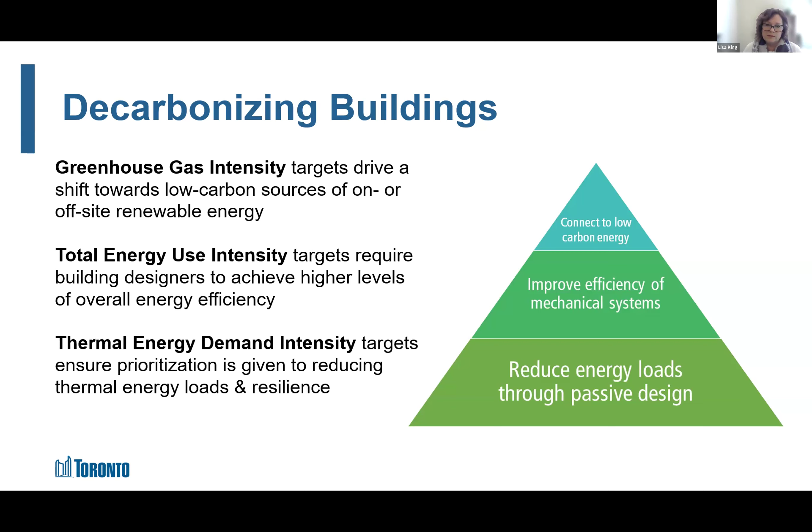In 2022, when we advanced TGS version 4, it focused a lot on climate change mitigation and adaptation in general, and we introduced embodied material emissions targets, but without numbers. Actually, not targets, but the process. So we introduced the requirement to do a life cycle analysis at that time, but we didn't include any numbers or targets. The reason we tried to introduce that was because we recognize how important embodied emissions are - to get toward that kind of aggressive action we're talking about, we have to start to deal with material emissions and not just operational emissions, as typical codes and standards do.

The upfront emissions from the manufacturing stage right to the construction of the building, starting at the construction site, and the transportation in between, account for a significant amount of life cycle emissions. So we're starting to look at the life cycle emissions of buildings as opposed to just what happens when they're operating.

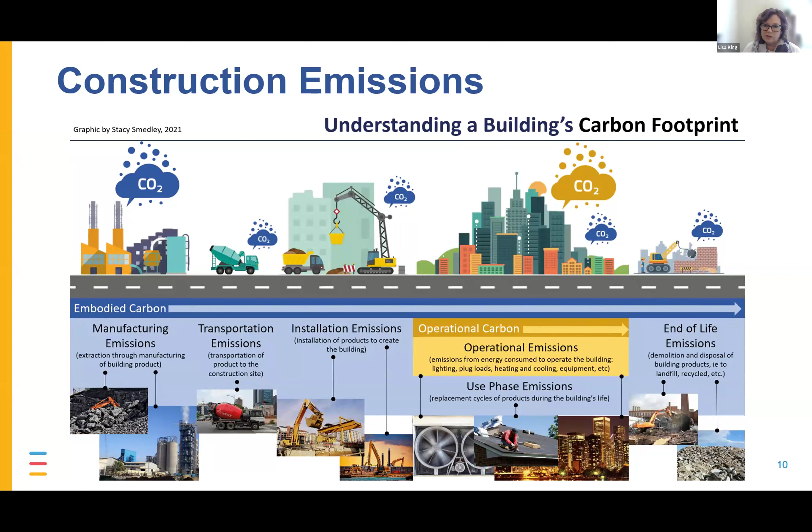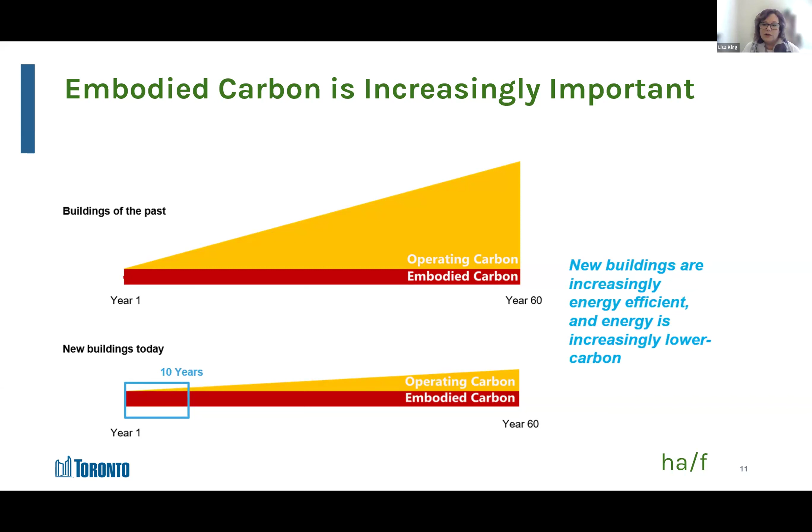And as we get more aggressive on those operational emissions targets, embodied carbon takes a more significant portion of the total emissions of the building. That's another important factor we've been considering, and the reason why we need to move on and advance into addressing embodied carbon from materials.

And of course, the global emissions aspect too, where I think this might even be low - at least 11% of emissions are coming from building materials and the construction stage.

So in terms of reducing embodied carbon, the approach we took was to go into study, which is usually what we do when we're looking at advancing something new within the Toronto Green Standard. We had a study undertaken that was funded by the Atmospheric Fund. It started in, I think, 2021, and it was for all Ontario municipalities, not just the City of Toronto, but we were kind of the guinea pig, I guess you could say.

That study was led by Mantle Developments with support from the HAF Studio, associated with the University of Toronto. That one, the regulating embodied emissions of buildings, Part 3 buildings policy primer, was mainly for Part 3 buildings. At the same time, there was another study going on led by Chris Magwood and Builders for Climate Action that focused on the low-rise Part 9 wood frame construction.

Together, those two studies basically educated all of us as municipalities on what embodied carbon is, why it's important, what the main emission sources are, how an LCA is done, but even more importantly, could we set some benchmarks or targets and apply them within our standards? We did have quite a bit of consultation and workshopping through that study too - that was a real part of the education aspect of it.

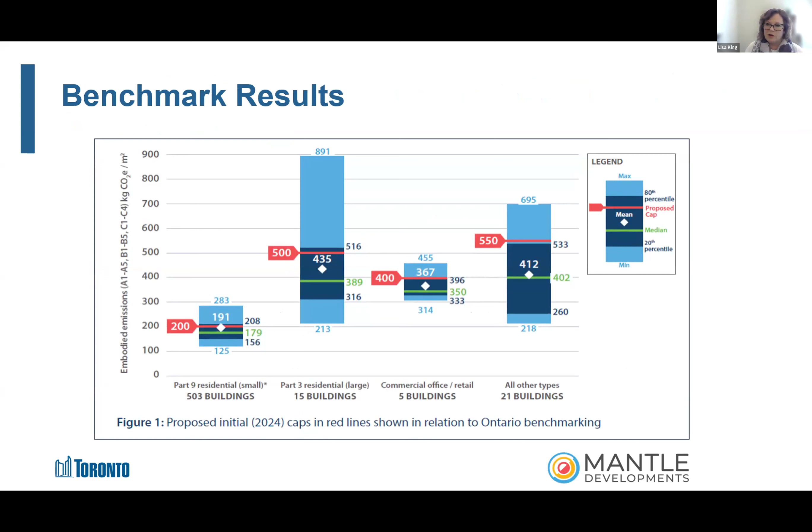Thanks, Lisa. So to get into what the caps actually are and what we're set at - we went to council with those reports, and council adopted the first embodied carbon caps in North America.

So we have mandatory caps for city-owned buildings and a voluntary tier 2 cap for private mid to high-rise and non-residential developments. Those two caps are the same: 350 kilograms of CO2 per meter squared for residential and commercial developments, and 400 kilograms of CO2 per meter squared for other building types. That is for life cycle stages A1 to A5, so just upfront.

Then we have another voluntary tier 2 cap for low-rise residential Part 9 townhouses, which is 250 kilograms of CO2 per meter squared, just for life cycle stages A1 to A3. And lastly, we have another voluntary cap for tier 3 as part of the Toronto Green Standard, as well as a high performance cap for city-owned buildings. Those caps are 250 kilograms of CO2 per meter squared for residential and commercial, and 275 for other building types, again for life cycle stages A1 to A5.

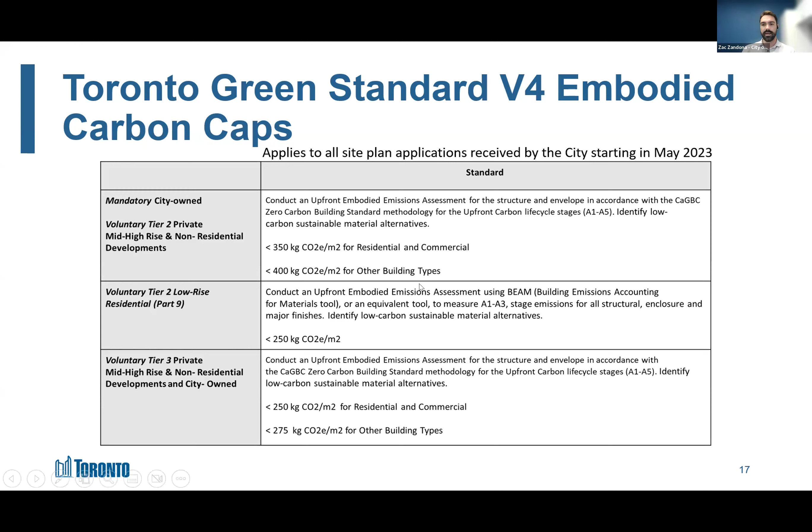Next slide, please, Lisa. So...

To explain compliance, methodology and verification with these caps: applicants are required to conduct a materials emissions assessment that accounts for the permanent structural and envelope elements of their buildings. At the site plan application stage, we are requiring a design stage LCA to confirm compliance. For the methodology of the LCAs and materials emissions assessment, we are guiding towards CAGBC Zero Carbon Building Standard version 3 or later, and for the submission of their report template as well.

We do veer slightly from CAGBC when it comes to the inclusion of underground parking - we require the inclusion of the underground parking GFA in the denominator of the intensity factor, in line with the NRC. That's the only difference between the CAGBC methodology and what we are requiring. Lastly, for verification, we require an as-constructed LCA to be provided and verified by a third-party verifier once the building is constructed. Again, we are only accounting for life cycle stages A1 to A5 at the moment - that's everything from raw material extraction to construction.

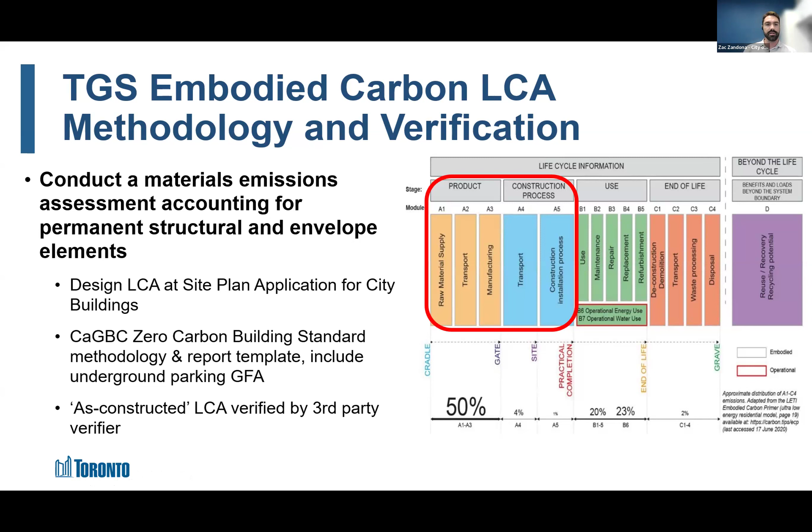Next slide, please, Lisa. It has only been a year since the requirements came into effect, and that might seem like a long time, but the city doesn't build too much, so we haven't really gotten any city buildings that have come in required to meet the caps. That goes for tier 2 voluntary private buildings as well. But we do have a couple of case studies where LCAs were built into the tender documents - we required an LCA for 2 of our buildings just to see where the buildings are at. They weren't subject to the caps.

The first building is a paramedic station at 300 Progress Avenue. They carried out an LCA for life cycle stages A1 to A5 and found that they were hitting 296 kilograms CO2 per meter squared. They also did a cradle to grave analysis and found they were hitting 380 kilograms of CO2 per meter squared. What they did to get there was use low carbon concrete - I think they were using EcoPact - and then lower impact XPS insulation and lower impact concrete sealant. Overall, they avoided about 800 tons of CO2 compared to conventional design.

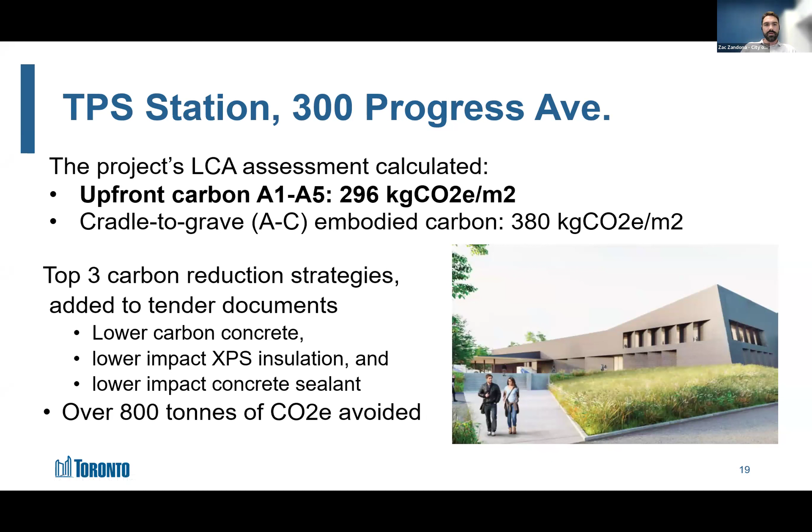Next slide, please. The next case study here is the Mount Dennis Child Care Center. This is the city's first net zero emissions building when it comes to operational emissions. They also carried out an LCA based on construction drawings and found they were hitting 220 kilograms of CO2 per meter squared. They did that using measures such as cellulose insulation for the walls above grade and the roof, and also used timber decks and wood beams.

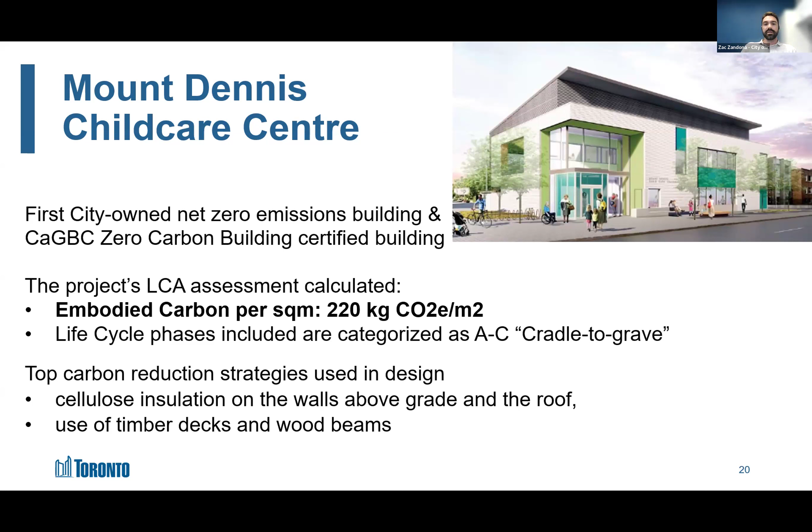Thank you. So some anticipated outcomes of our caps - like Lisa mentioned before, the Toronto Green Standard is a market transformation tool, but specifically for embodied carbon, we expect more EPDs to become available as more LCAs become required and completed over time. We expect increased professional expertise, whether for carrying out LCAs or building design optimization. And we also expect product availability, like low carbon product and material availability, to increase, as they'll be a key factor in order to comply with our caps.

As the Toronto Green Standard has set out historically, requirements get more stringent over time. Right now, private buildings are not required to hit our embodied carbon caps, only city buildings are. But if the trajectory goes as expected with the TGS, you can definitely expect mandatory caps will come into effect in the future, which would greatly reduce embodied carbon compared to what we're doing now.

We expect other jurisdictions to follow suit. We are the first jurisdiction in North America to have embodied carbon caps on buildings, and historically the TGS has seen replication in other GTA jurisdictions like Whitby, Vaughan, and Mississauga. So we expect those jurisdictions to come up with their own embodied carbon caps to further reduce embodied carbon, not only in the GTA and Toronto, but perhaps Canada as well.

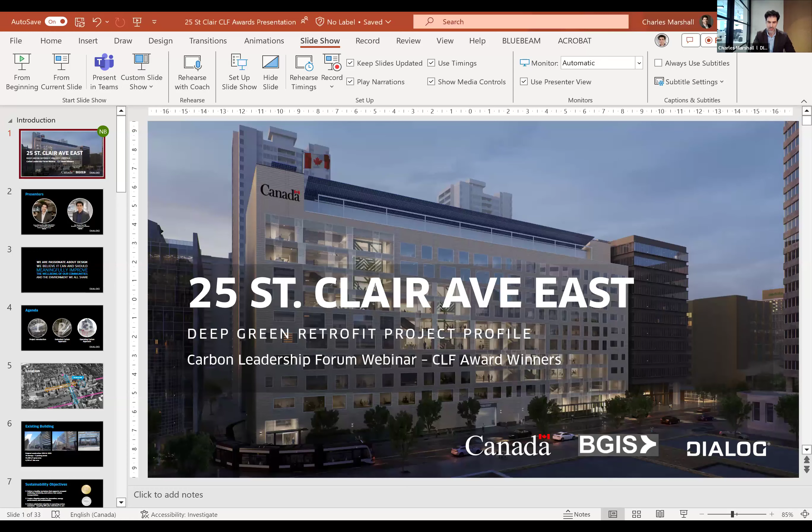Great, and thank you again to Zaina and the CLF team. We're truly grateful to be able to present this project here today, and great to share the story. Thanks to all for attending. We'll begin by giving some credit to our clients, Government of Canada, Public Services Procurement Canada, and BGIS, who certainly brought a lot of leadership and ambition to this project, and we're very proud to tell this story today. So we will share with you a brief case study of 25 St. Clair Avenue East.

This is a deep green retrofit project, taking a 1950s era office building and retrofitting it comprehensively for cutting edge, zero carbon performance, maintaining almost completely the existing concrete and steel structure to substantially retain embodied carbon at construction, and delivering a great, modern, healthy workplace. We're very grateful to CLF for recognizing the project for an award in the major retrofit category, and very happy to tell the story today.

Just first, a little bit of who we are. Myself, I'm Charles Marshall, engineer and partner with DIALOG in our Toronto studio, chair of the Toronto studio, and co-lead, having the great pleasure of co-leading our sustainability and building performance practice here at DIALOG. And I have the great pleasure of co-presenting today with Neil Babishi, who's an associate here in our Toronto studio and our national technical lead in our building performance team.

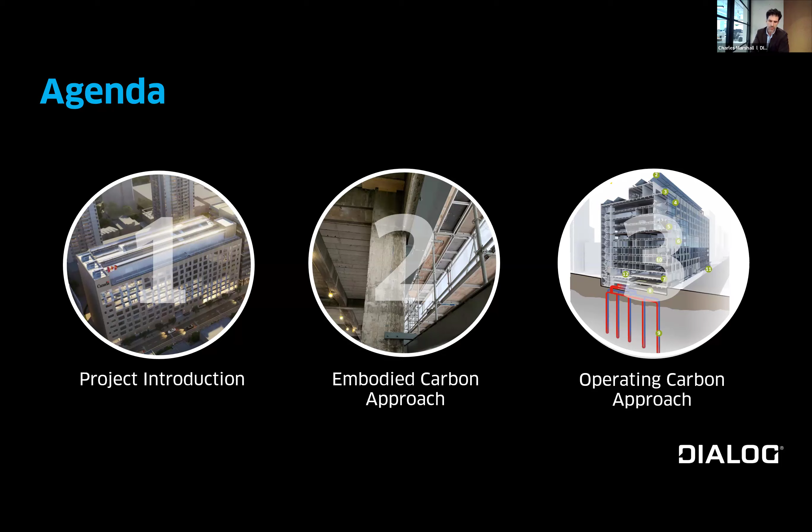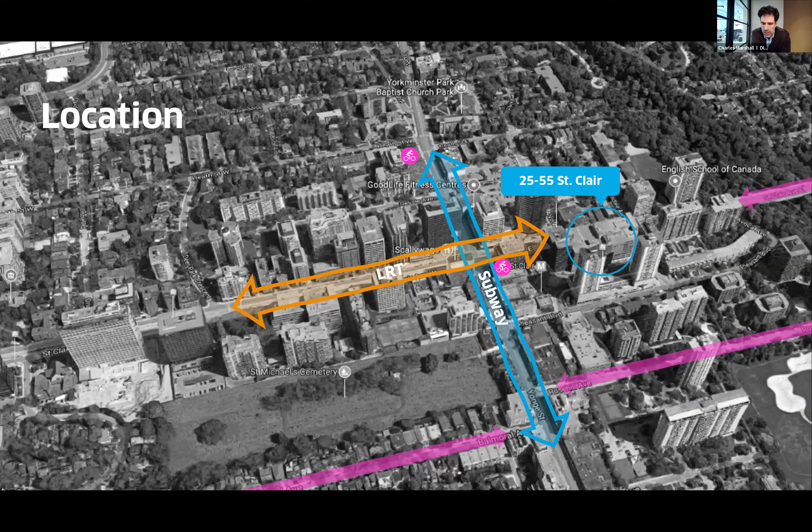So just a little bit of background about the project. It's a fairly substantial retrofit project to a building in midtown Toronto, right at the intersection of Yonge and St. Clair. When contemplating a deep retrofit project, two key considerations are location and connection to transit. We believe this project was immediately a great candidate, being right at the intersection of the new St. Clair West LRT line, the Yonge Line subway, and connected to bicycle infrastructure and, although not highlighted on this chart, the Ravine network here in Toronto. So a great location for an office building and a great candidate for a comprehensive retrofit.

This is a bit of a misnomer, we say existing building, but it was actually once upon a time existing buildings built five years apart. This is the beauty of a history of cities woven together over time, even more so through this project: two 10-story office buildings plus parking plus penthouse, originally constructed in 1954 and 1959, one primarily a traditional concrete structure, the other a hybrid concrete and steel structure. A fairly substantial building with a footprint of just over 42,000 square meters of gross floor area. And a tight site, only about 4,200 square meters of site area. You can do the math for a 10-story building, but really not a lot of space, which affects the project in many ways, particularly construction, logistics, and what you can pull off in a very dense urban environment.

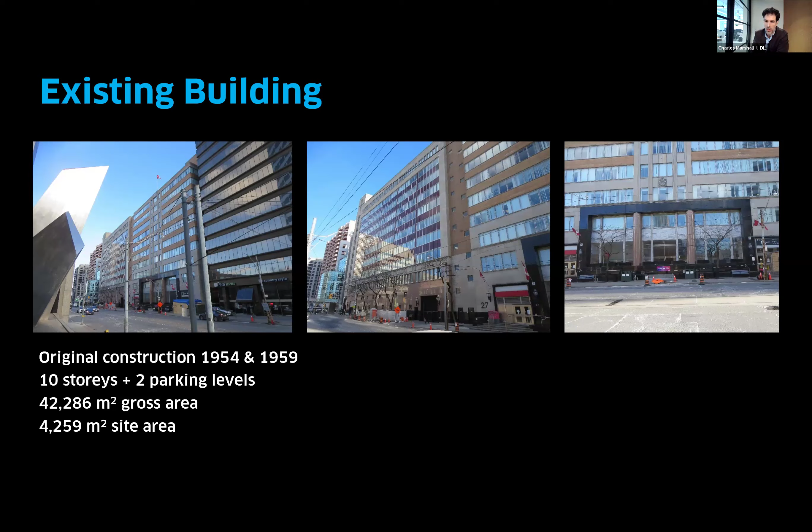So lots of fun doing these projects. They are hairy, but all the more adds meaning to the impact.

Kudos again to our client at Public Services and Procurement Canada. They were very clear in identifying this project as a potential flagship project for innovation, for decarbonization, for energy efficiency, and for zero carbon performance. That was their approach almost from day one, and it really sent clear signals to the design and construction team that this was the mission. But even more important than that is the project objective to deliver a modern, healthy workplace that supports occupant well-being, inclusivity, and active transportation. We can talk about these projects like they're an object or a box that uses energy and carbon, but most importantly, this building is a workplace for up to 2,000 Government of Canada employees in various departments, and it aims to be a very progressive and healthy one.

When we talk about objectives, it was set pretty early on that there should be a very healthy target for operating carbon reduction and energy efficiency. The benchmark there was to achieve over 80% reduction from pre-retrofit to post-retrofit conditions from an operating carbon perspective - a pretty wide approach to demonstrating value and achievements through certifications.

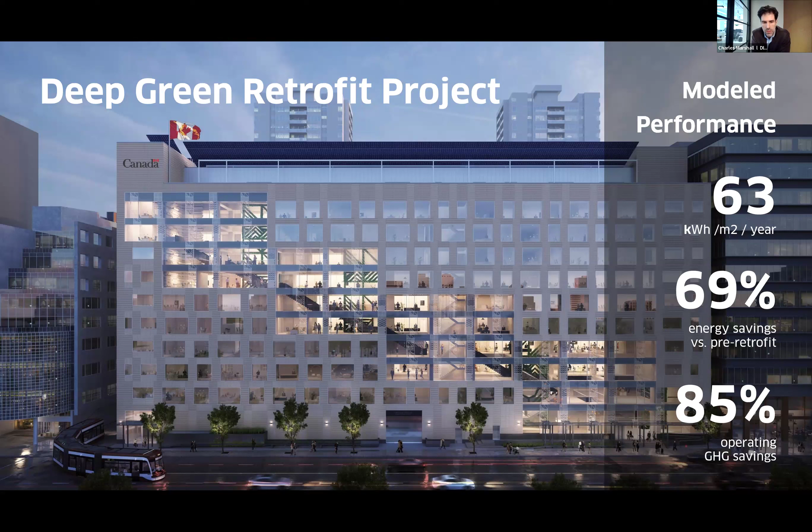I don't want to steal too much of Neil's thunder, but I'd say from a modeled and designed perspective, mission achieved some pretty impressive numbers from an operating perspective. Ultra low EUI, substantial energy savings, and met the project objective for over 85% operating GHG savings. The building just opened this fall, and we're beginning a comprehensive measurement and verification program to determine how we're tracking towards these targets in actual operations.

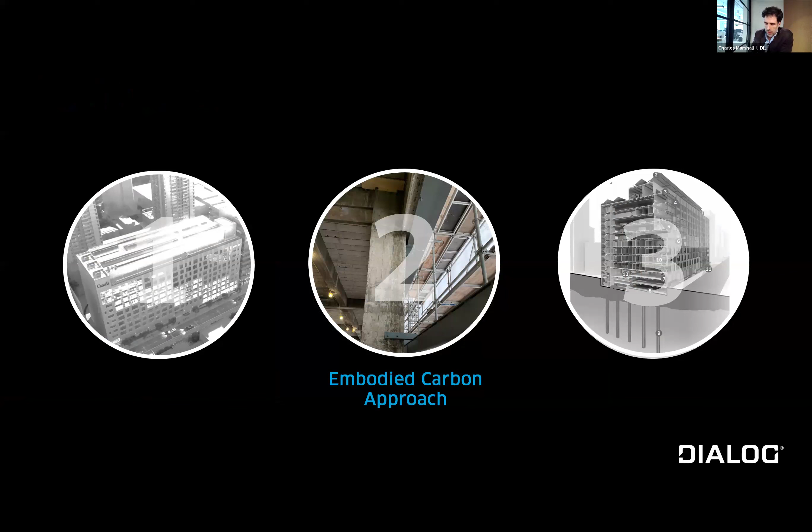Not an easy thing to do. Lots of tough decisions here, lots of investigation, lots of response to site conditions. Definitely takes a level of ambition from a project team, but we think the carrot is worth it when it comes to retaining all that existing concrete and steel. It's easy to say they don't build them like they used to, but the truth is a lot of these old office buildings have a lot of service life remaining and quite good bones, so to speak. A lot of work went into understanding the existing structure and being able to work with that.

A lot of work went into taking a 1950s era building and upgrading it so it could truly be a first-rate workplace and modern environment. But I really think this is key if we think about meeting our goals for economic growth and the future of cities, while also meeting our carbon goals. The reuse of building fabric is a key part of that strategy. I don't think I need to convince this crowd about that.

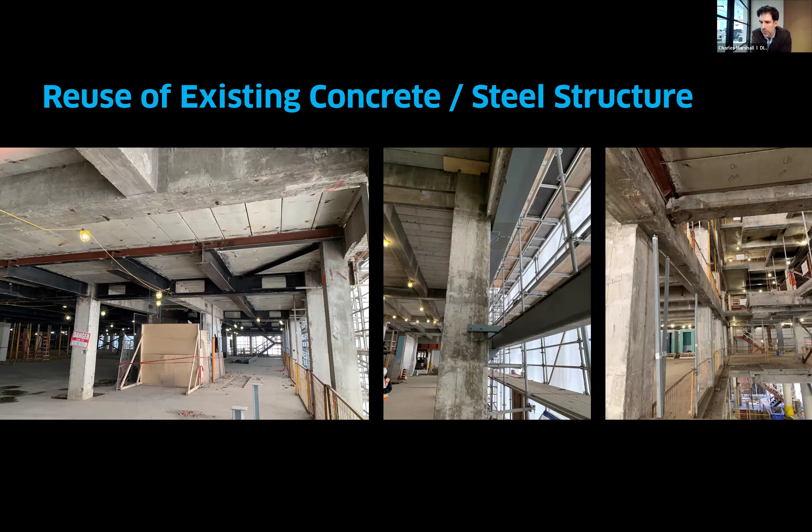On the left-hand side, what you see is kind of a cheeky photo. This is the moment where what was 25 St. Clair becomes 55 St. Clair, and you can see the transition there from the concrete structure to the steel structure. Kind of a cool thing that one does not see very often.

Let's put some numbers to that. On the left-hand side, you'll see a breakdown of the life cycle assessment we conducted for the project. The scope of the LCA included foundations, structure, and enclosure. It excluded MEP and interior materials, as was the convention when we were designing this project, and I'd say is still the convention. Lots of discussion about that. So you could do the math here, but about 75% of embodied carbon of the structure and enclosure is in fact the structure. So that is roughly the portion saved by maintaining that existing building and making this a retrofit project rather than a new build.

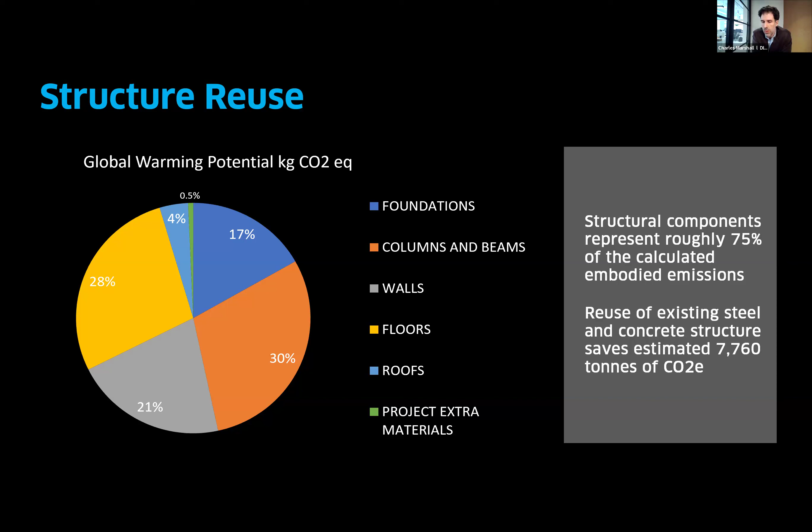And the impacts there are substantial. We estimate, or calculate, about 7,700 plus tons of CO2 equivalent saved by maintaining that existing structure. Definitely a project type we are very excited about, and an objective we're quite happy this project achieved.

As you break down a little more of that LCA, you can see a few key takeaways, including that about 91% of the embodied emissions calculated by the LCA are upfront carbon. So it just reinforces our understanding of the importance of making those right decisions. Obviously this is a retrofit context, but generally it's understood that optimizing structure and the right material choices and so on are very key, knowing the importance of that upfront carbon.

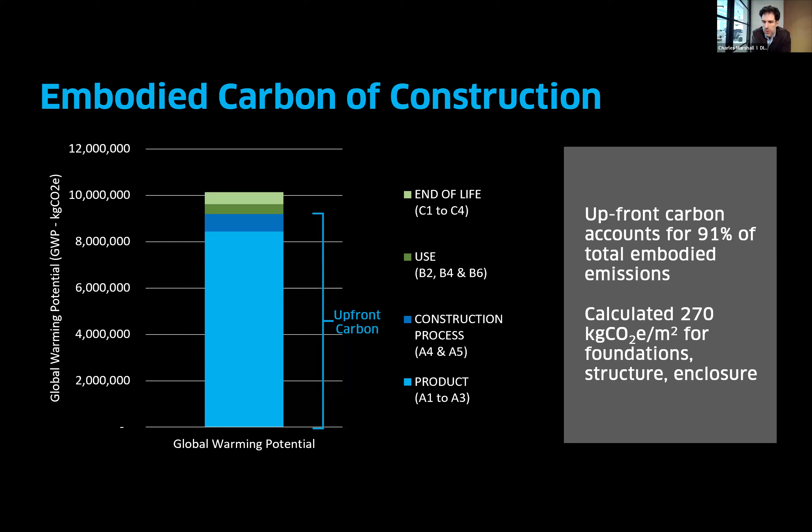And then, interestingly, following on the previous presentation from the City of Toronto, we calculated our kilograms of CO2 equivalent per square meter, or embodied carbon density or intensity, and found it to be about 270 kilograms CO2 per square meter. So on the lower side, I'd say, for what we're seeing for office buildings, but definitely a good value for us to have. As we went through our own journey the past five years or so working on this project, it was good to have that benchmark for our own portfolio.

And these are the journeys you go on as you innovate. Back when we started this design, we did not have the benchmark study from the City of Toronto, although we're very grateful to have it now.

We did a benchmark at that time and found ourselves to be in about the 25th percentile for office buildings, based on the slightly older CLF benchmarking study. The number looked a little bit lower to us, but was statistically right in line.

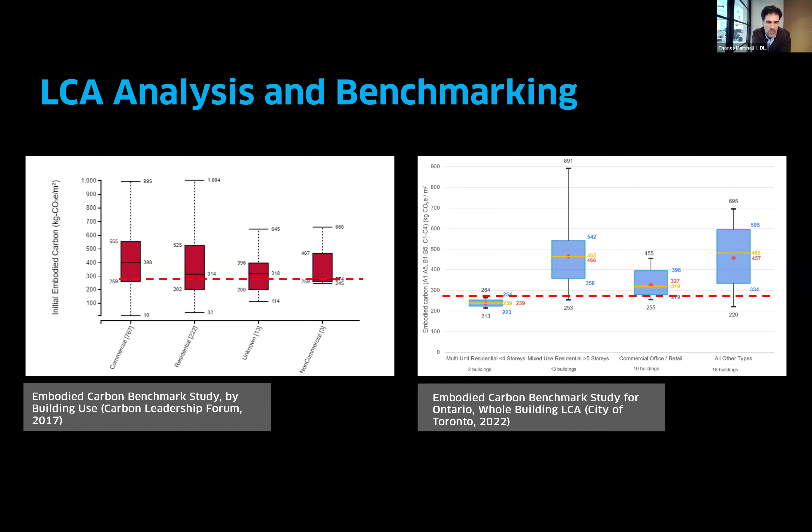Similar story when we later compared to the City of Toronto data. All of this went into our CAGBC zero carbon certification package. Those familiar with the zero carbon program know the workbook and material that goes into it, and we went through that verification process through Canada Green Building Council, which was fairly rewarding. Then later on, as you read the white papers coming out, we decided, how about we harmonize?

Back in 2018, we were using the Athena tool quite a bit for doing our LCAs. Over time, our practice has evolved a little bit, and primarily we're gravitating towards One Click LCA right now. We had takeoffs and good knowledge of the building, so we went ahead and redid that and did a bit of a comparison.

I know there are some other studies out there comparing LCAs against each other and harmonizing. What we found more or less confirmed that we felt we were in a really good margin of error, so to speak - a similar benchmarking result for that embodied carbon intensity, but just different enough that we felt this was a good, useful exercise to compare those tools.

So yeah, on the embodied carbon journey, a project we're quite proud of. We are quite happy to do more of these deep green retrofit projects. Frankly, we think the planet needs them, and we're glad to see the impacts of that.

Of course, as we take on these projects now, we are looking a lot more at the other 25%. There's a lot more material information available these days - EPDs, product-specific EPDs, and so on for insulation, glazing, roofing materials, and so on. Although we love saving that 75% from a building reuse project, the other 25% remains vital. So definitely good lessons learned as we approach future projects.

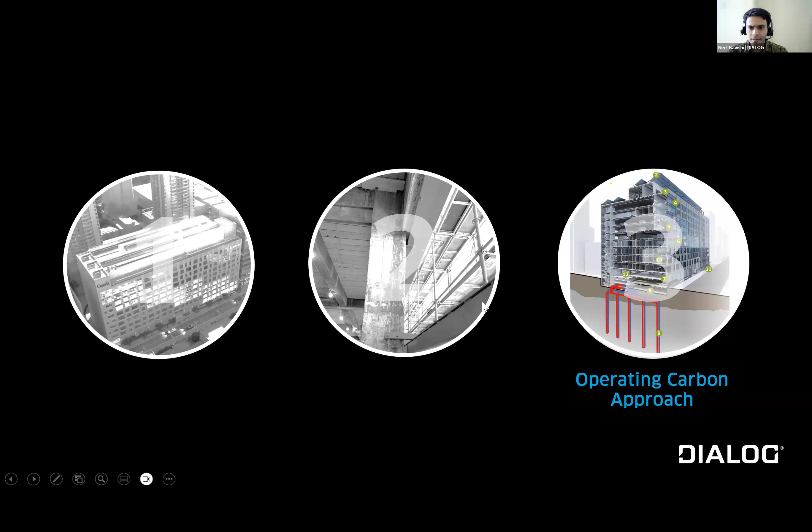Thanks, Charles. As Charles mentioned, I'm going to switch gears a little bit here and talk about operating carbon and our strategy to getting to net zero emissions there. So really kind of four key areas of focus, not unlike any other high performance building we deliver here.

We really started off with understanding the internal gains of the building, which refers to all of the plug and process loads that influence the building's overall energy use. That required us to work quite collaboratively with BGIS, the facilities manager, PSPC, as well as the tenants, to get a really good understanding of what kind of equipment is going to be used in the building - right down to doing detailed plug load questionnaires to understand how many computers and monitors will be used, IT room equipment, etc. That really helps us understand the potential to harness waste heat within the building and recycle it to lower heating loads.

And then very quickly, we focused our attention on developing a high performance building envelope solution, focusing on passive design measures to bring our heating and cooling loads down to a very low level before we move into the more active mechanical interventions. That primarily focused around optimizing our air strategy for a more efficient way of delivering heating and cooling within the building, again really maximizing the potential for energy recovery.

And finally, all of that ultimately led to a state where we had the ability - and all the load reduction measures really enabled us - to implement a high performance all-electric energy system that was primarily driven through a geothermal system, and we'll talk about that in a moment here as well.

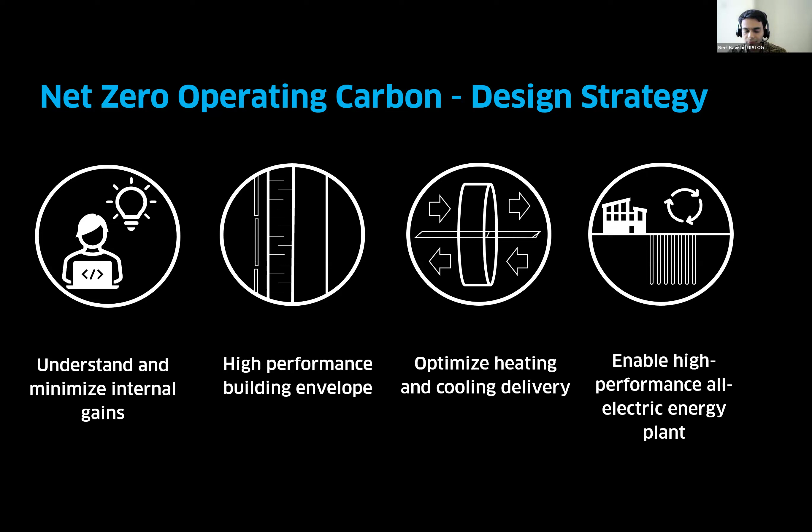The opaque wall assemblies were almost entirely uninsulated masonry, so about R3 in terms of thermal performance. The new section of the building did have some spandrel with backpan insulation, but again, as we know, it's not the most thermally performing. Most of the windows were generally double glazed, air filled, but again, no thermal breaks, no low E coatings, and somewhat on the lower end of the spectrum as far as thermal performance is concerned.

In terms of the evolution of the facade concept, there was a real opportunity to reimagine the building facade that faces St. Clair Avenue and Yonge Street. This was one of the few facades that was not surrounded by tall buildings, so we had some good amount of solar access, and an idea quickly emerged of having this stepped and highly transparent curtain wall section to take advantage of the daylighting opportunity.

That was then paired with a key design move of incorporating a staircase that cuts diagonally across the building, and that really was meant to promote a more active and healthy form of movement within the building.

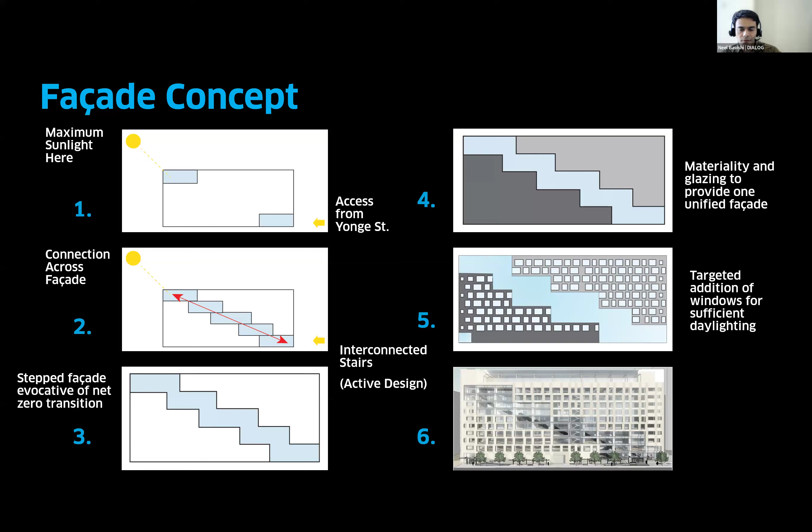The other architectural idea there was more evocative of a net zero transition, and sort of emblematic of the government of Canada's transition to net zero.

Just kind of reiterating some of the key performance characteristics. A very low window to wall ratio of just about 23%, a very high performing opaque wall assembly, effective R28, including the impact of thermal bridging. Triple glazed curtain wall systems with thermally broken framing, and we also conducted whole building air leakage tests to verify the performance of the air barrier. All in all, we landed at a model TEDI value of just below 15 kilowatt hours per square meter.

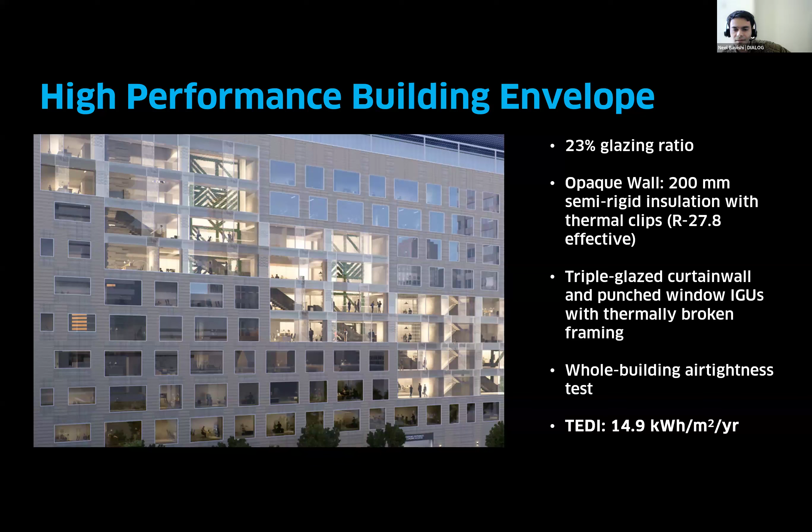In terms of the mechanical system solutions, we sort of entirely reimagined this. Dedicated outdoor air systems in lieu of your conventional variable air volume systems with reheat, highly efficient, equipped with very efficient enthalpy wheels to recover heating energy.

Really the secret sauce here was the geothermal system. This consisted of heat pump chillers, that would enable us to recycle heat within the building as well as exchange heat between the building and the ground. So in many ways, it really functioned as a seasonal thermal battery, and allowed us to provide heating and cooling at a very high coefficient of performance.

Finally, we did have electric boilers and water-cooled chillers to provide peaking capacity, but again, the bulk of the heating and cooling was done via the geothermal system.

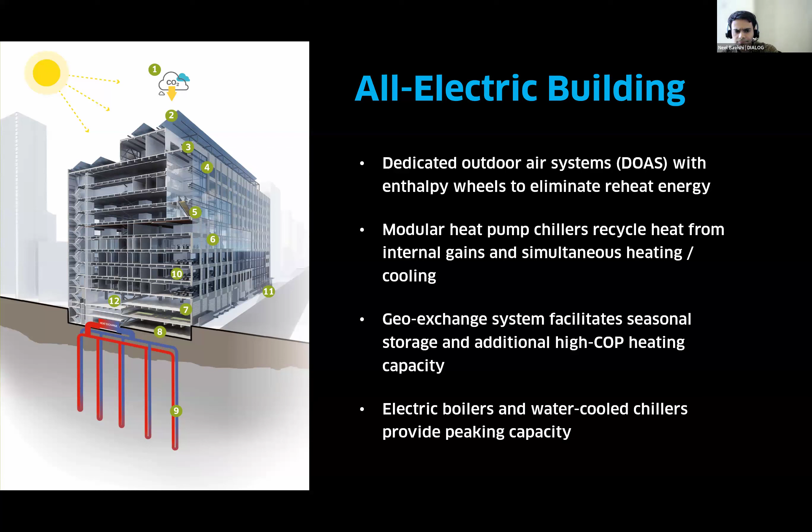Just to give you a little bit of an idea of what it looks like, drilling a geothermal system underneath an existing building. Some statistics: about 63 boreholes, 600 feet deep. We did look at a few different options for locating the geofield site, and we sort of landed underneath the existing parkade, given some of the site constraints and limitations. If you do the math, it works out to just under 40,000 feet of linear drilling, and that required a lot of innovative techniques and specialized drill rigs.

The end outcome there was a geothermal system that could provide heating for just under 950 kilowatts at a COP of 4.0. So you think about a boiler operating at efficiency of 100% - it's about 4 times more efficient using a geothermal system than it is through a more conventional means.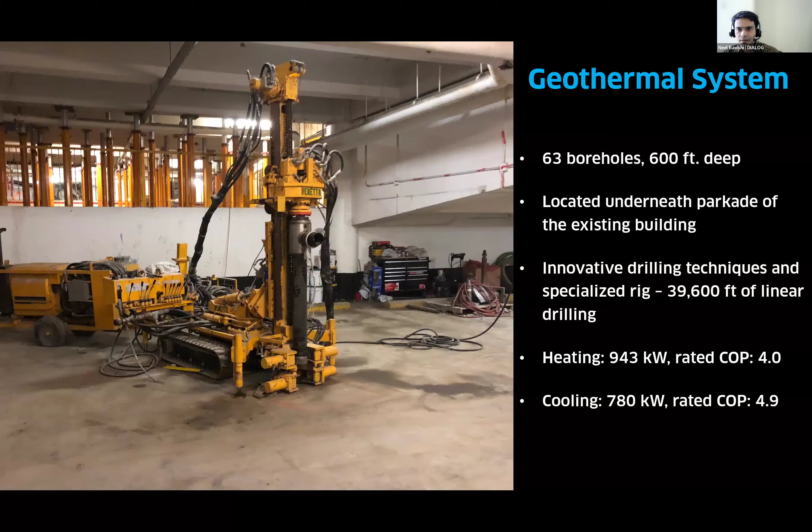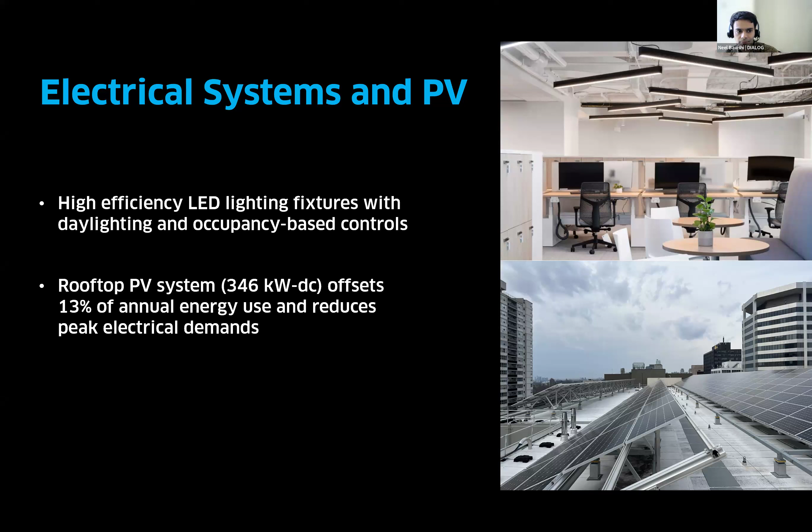Switching focus on electrical systems and PV, of course, high efficiency lighting throughout the building with daylighting and occupancy based controls. We did manage to put in a rooftop photovoltaic system, just about 346 kilowatts of DC power, and that's enough to offset about 13% of annual energy use in the building, and also help reduce our peak demands.

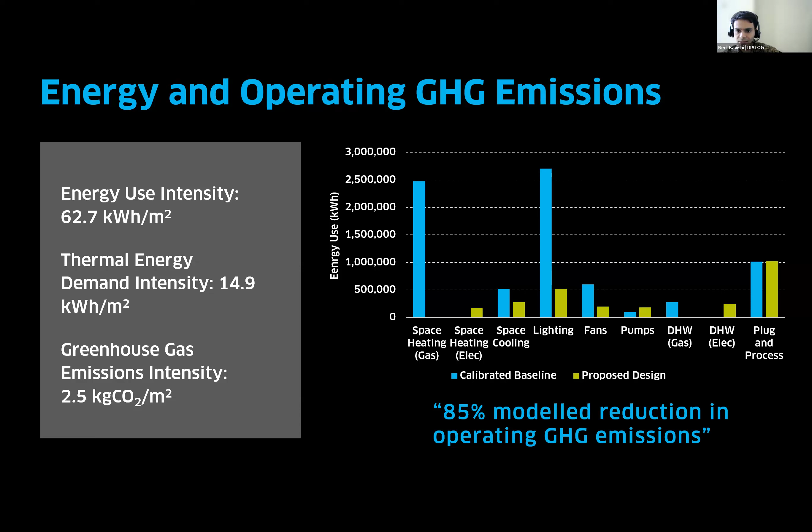Of course, the greenhouse gas emissions here are just purely representative of the electricity emissions from the grid, and the government of Canada does intend to offset this at a portfolio level to reach net zero operating carbon. All in all, an 85% reduction in GHG emissions compared to the pre-retrofit baseline condition.

As we change our perspective from looking at operating and embodied carbon separately to combining them into whole life carbon, we did an interesting analysis comparing a deep green retrofit scenario for this project against a business-as-usual scenario. There's an embodied carbon investment in doing a deep green retrofit, primarily around building envelope and cladding, causing an initial uptick in emissions compared to business as usual. But that's very quickly paid off by the reduction in operating carbon—the math works out to about a 5-year carbon payback. Extrapolated over a 25-year life cycle, that's equivalent to about 10,000 tons of reduced GHG emissions compared to the baseline condition.

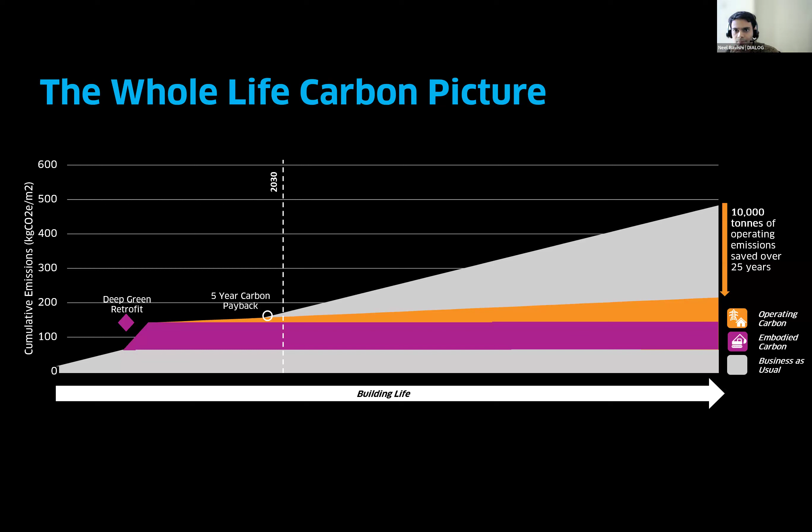And with that, I think that's the last slide. So I'll pass it back to you, Zaina, and we can open it up for Q&A.

I have a series of questions that came through in the chat. The first one is somewhat answered already. There was a comment and a question: great to see that the City of Toronto is pushing for leadership in this space. How do you account for data quality issues still inherent in EPDs and LCAs, which challenge the notion of precision inherent in your targets?

Lisa responded: just to say that we're aware of that issue. I don't think we have a solution to it yet. I think it requires more standardization across the board, whether it's to do with EPDs and how they're reported, or which EPDs we're using—if we could develop a local set of EPDs, for example, for products and materials in Ontario. So I think there are some new tools and approaches that need to be developed, but I'll pass it over to Zach—it's early days for us looking at LCAs as well, so that'll also be part of it.

Zach added: we definitely realize there are data gaps when it comes to EPDs. We're being flexible at the moment with the data being used—we would accept industry averages or EPDs for equivalent materials as long as it makes sense and is justified. That's how we'll deal with it for now, but like Lisa said, this will definitely improve over time, and as it does, we can make our requirements around what data is required more strict. It makes sense to use the information available now, and refine the process as it gets more detailed.